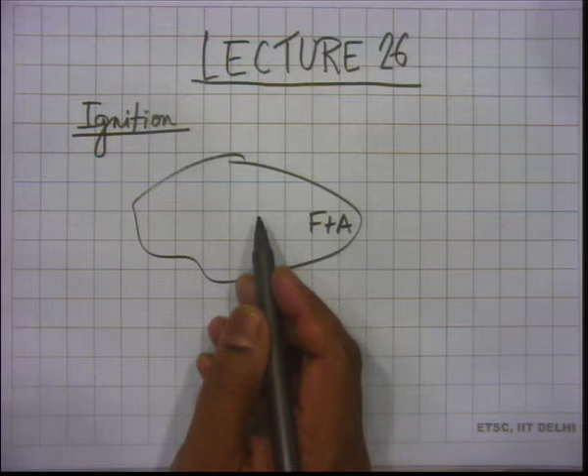So if you have a zone with a fuel air mixture, and you want to ignite it, you probably know from internal combustion engines or general knowledge that if you give a spark here, it might get ignited. A spark plug can be something like this: it has one electrode here, another electrode here, and when you give a spark, you are placing a very high voltage between these two electrodes, which breaks the dielectric between them, and then there is a spark kernel.

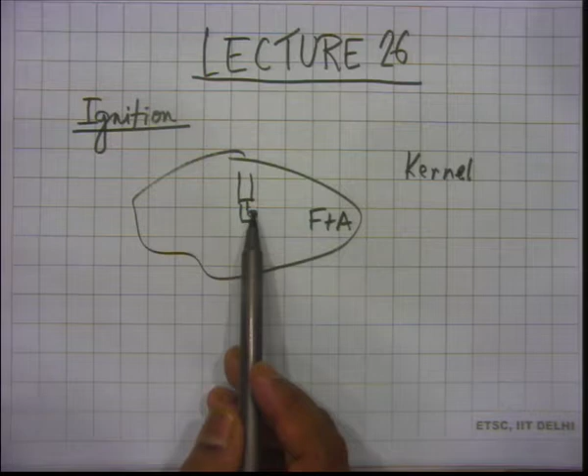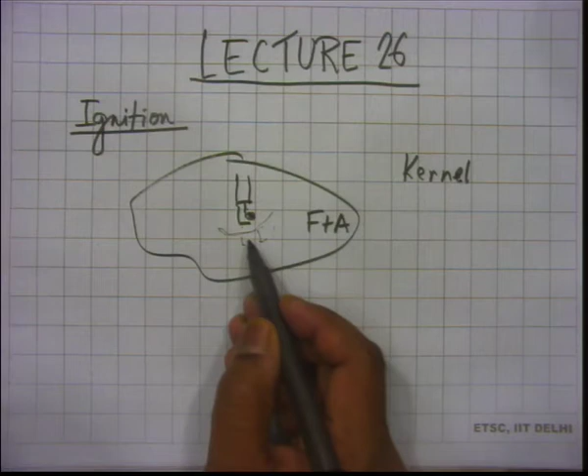Kernel is spelled K-E-R-N-E-L, spark kernel, which gets produced. That is a small zone at very high temperature, with active chemical species and ions. That high temperature and active species will help generate a flame which later becomes bigger. Then if it is an engine, for example, that flame will propagate like this. It doesn't have to be an engine, but as an example, in a spark ignition engine, that is what we do.

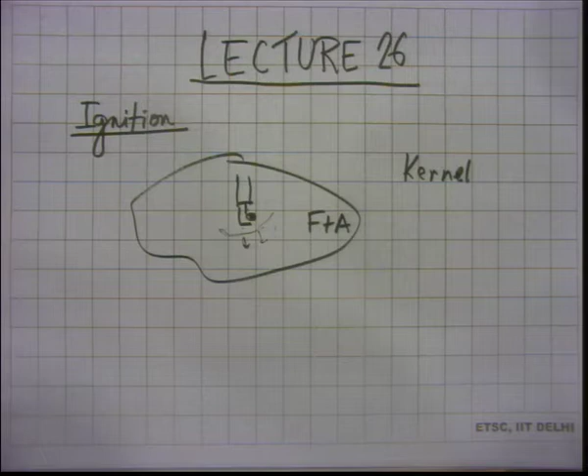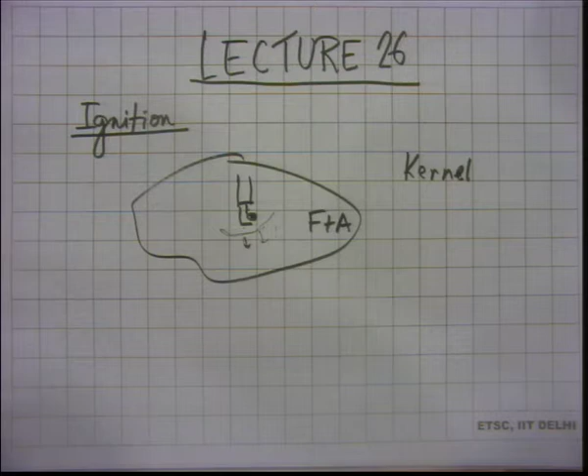So this is one mode of ignition. There can be another mode: you can bring a small flame, like a pilot flame, into the fuel air mixture, and that creates ignition. There are other modes of ignition which we are not discussing today, but we are primarily focusing on this spark ignition method. So you are creating a zone at high temperature where some active chemical species are produced. Let's say this is the kernel and this is the fuel air mixture.

Then what is actually successful ignition? Successful ignition is when this kernel is able to ignite and give a proper flame, when it is able to sustain itself. Imagine a situation where you have given a spark, created this kernel, but it is not strong enough, and after a small length of time, it gets extinguished. Then that is not successful ignition.

In fact, in engines you can have misfiring. Just because you are giving a spark does not mean it will be successful. If it is successful, then it is ignition. Some of you have done combustion experiments in the lab, and you know we have spark igniters there—if you press them, depending on the igniter, you can get one spark or multiple sparks, but they do not necessarily always ignite the mixture.

So what is successful ignition? Successful ignition is when that spark kernel you have produced sustains, becomes bigger, and then gives you a flame. Now in the process, we have to remember that we will try to model this situation and find out something about this zone we are creating with the help of a spark—the spark kernel.

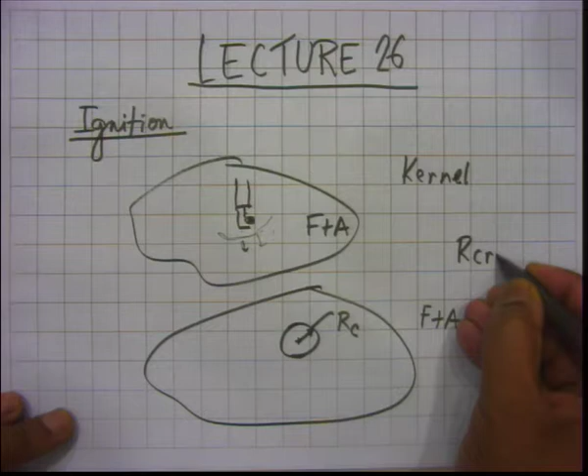Now, in Turns's book, he writes it as R critical, but we will just write RC, C for critical. And if I write a radius RC, that means I am assuming that this kernel is actually spherical. But that of course will not happen.

You can very well imagine that that is not going to happen, but again it is an approximation. So we can think of a situation when we have this zone of fuel air mixture, sufficiently large, in which we have created a spherical kernel, and we want to see when it will be successful, when it will propagate. We understand that smaller radius is probably not going to work, though actually we do not understand, we just think probably it might happen that way. So think about it, if it is too small, then what will happen?

We feel that if it is too small, it will likely be unsuccessful. The ignition event is likely to be unsuccessful. But is that a correct thinking? And how do you think about these issues? If it is small, then what happens?

It might not come in contact with a sufficient amount of fuel, so as to release the quantum of heat necessary to sustain it. So, area of contact, right? But we again have the same argument as before. Yes, you are absolutely right, the same sort of argument that we had yesterday.

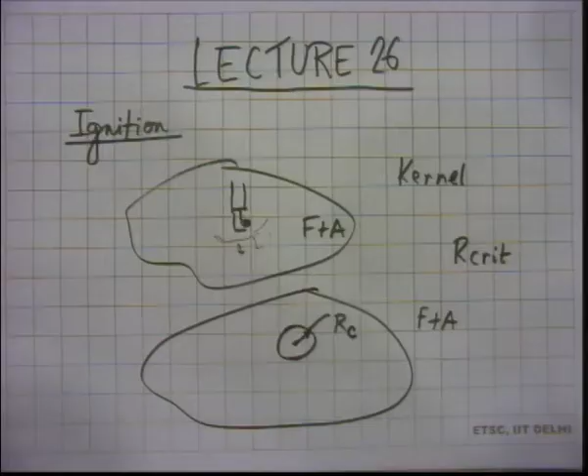So you expect that for small kernels, the heat loss is likely to be stronger than the thermal energy released in the flame. We will keep that argument in mind. So it looks like we will have a critical size, below which the kernel will not be successful in producing sustained ignition. More than this critical size, it will likely be successful, because the area by volume ratio has decreased, so heat loss has decreased compared to heat generation. This is what we suspect. So again, we will use that limiting argument of heat loss equal to heat generation.

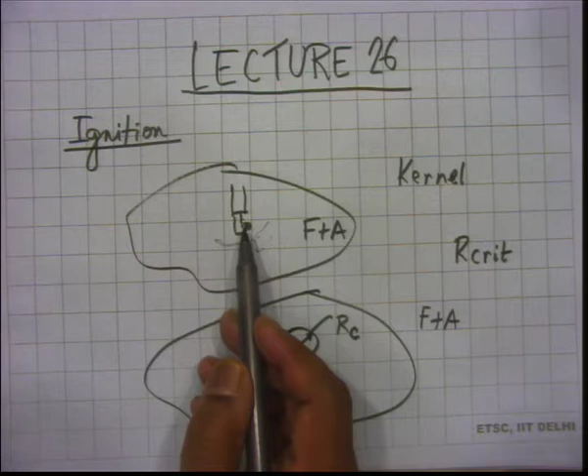Now, before we proceed, just one more factor. We will analyze this sort of situation, a large volume of fuel air mixture in which we have a spark kernel, and do the analysis based on that. But of course, in reality, if you have a spark plug giving a spark in an engine situation, the kernel loses heat not just to the surrounding gas, but probably also to the solid of the electrode, to the body of the spark plug.

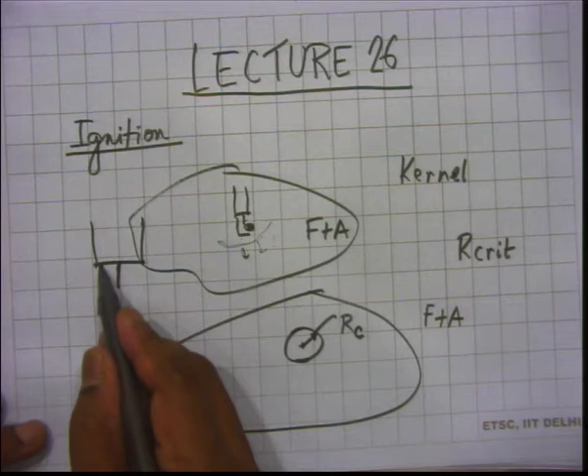So it will lose some heat out there. The gap between the two electrodes, if I draw the spark plug again here, this is one electrode, this is another electrode, the distance between them is also going to matter. If the distance is small, you are likely to have a small kernel with large heat loss, things like that.

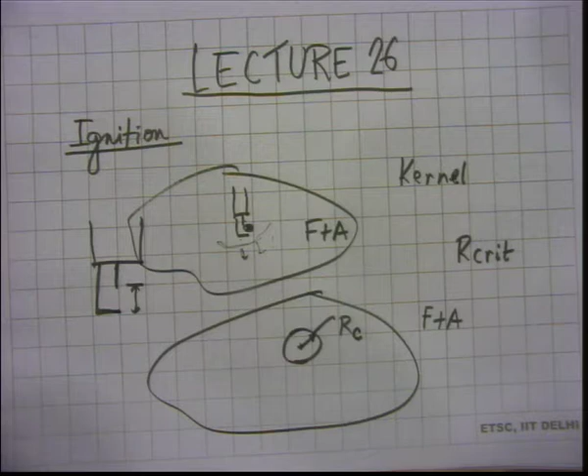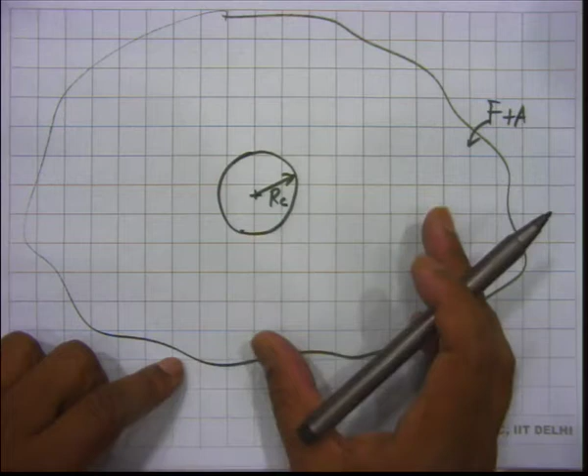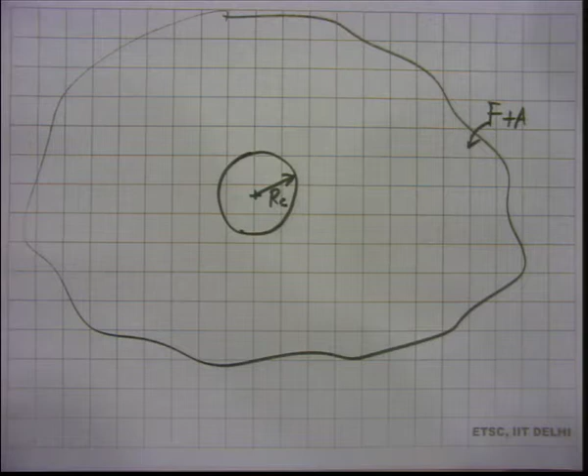So in the spark plug design, these issues are actually taken care of. But in our analysis, there are no electrodes, our analysis is just like this. Keeping this in mind, we talk about that kernel zone, and we call this radius RC, in this larger fuel air mixture. In fact, in the drawing, the kernel appears exaggerated, big enough and comparable to the fuel air volume, but it's actually very small compared to that. This fuel air mixture extends to large distances, and here we are considering a quiescent mixture, with no flow in the system.

In an engine, if you have the spark plug giving a spark and creating the kernel, there is flow. Because there is fuel air mixture in the engine, there is piston movement, there is turbulence, there is a lot of flow happening out there.

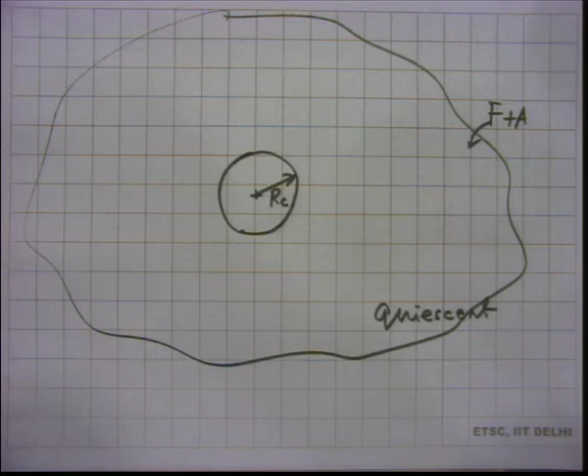In a flow situation, things will change. This kernel which we produce here will tend to get elongated in some direction depending on the flow, and the flow will contribute to heat loss in some ways. We are not in a position to describe all these things in detail.

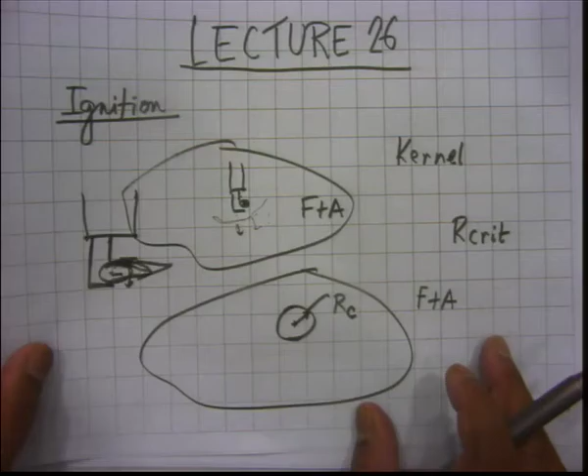So we are taking, as usual, a simpler situation where it is just the quiescent fuel air mixture. You are giving a spark, electrodes are nowhere to be seen, and you have generated this volume which is at a temperature of, let us say, Tb, the burnt gas temperature. So it is at Tb, and it is also reacting and releasing heat.

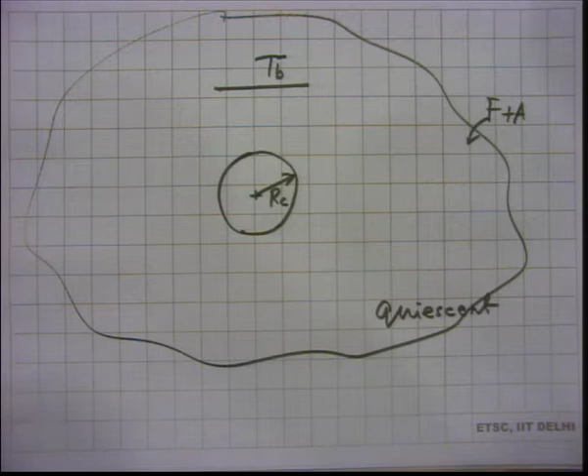That's within the sphere volume. Beyond the sphere volume, what do you expect? You expect the temperature to go down. It will go all the way down, and at sufficiently large distance from the spherical volume, the temperature should drop to Tu, the unburnt temperature.

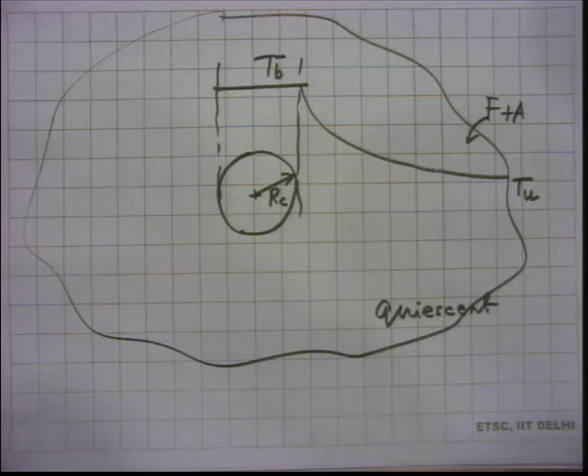So what is the sort of balance that we do? There is some fuel burning here that is generating heat.

So it is minus m dot f triple prime bar into delta Hc. This is per unit volume. This is the heat which is getting released, the thermal energy released because of chemical reaction. The spark has helped it, reaction has taken place, and this is releasing this much amount of heat.

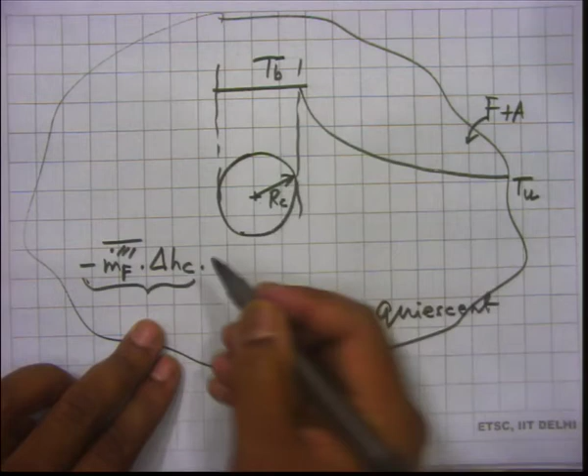And that multiplied by 4 pi by 3 r c cube. Why are we taking RC, R critical? Because we are looking at the limiting situation when heat generation is equal to heat loss. So that happens, and that will be equal to the heat loss.

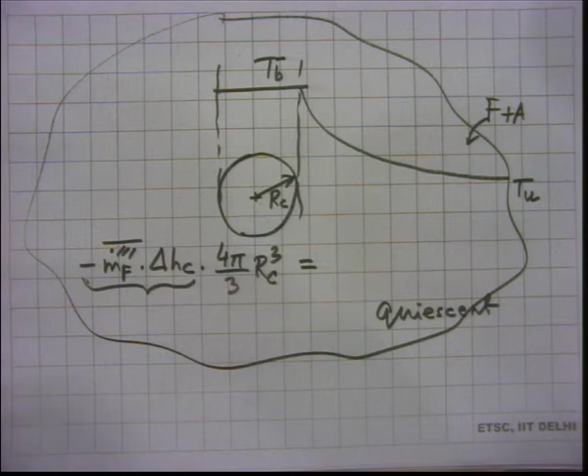So the heat loss will be minus K, then area is 4 pi R C squared, and then there will be dT/dr at r equal to RC. So this is minus Ka dT/dr at r equal to RC. So these two things should actually be equal.

So here comes the next question: how do you get dT/dr at r equal to RC? This is heat loss from that spherical volume to the surrounding gas, to the surrounding fuel air mixture, which is at a temperature lower than Tb, and which has a temperature variation in it.

So it is Tb at the boundary between the spherical volume and the unburnt gas, but as you move away from the spherical volume, temperature keeps decreasing, and sufficiently far away it becomes Tu. So the question is, how do you get dT/dr at r equal to RC, at the boundary of the spherical volume? That is the question.

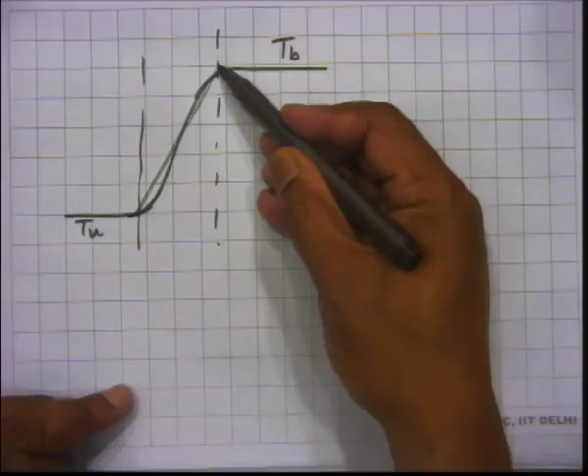So in the flame zone, the temperature variation is not linear, but we expect some rounding off here and there. We didn't know how to determine this exactly—if you want to, you have to solve a more complicated set of equations. We didn't want to do that, so we took this to be some linear temperature profile. But that was in the flame zone, a combustion problem we were trying to simplify, part of the derivation for laminar burning velocity SL.

Now, coming back to what we are doing today, we are trying to get dT/dr at r equal to RC. That can be obtained if you get this temperature profile.

Okay, now where is the r? R is the radial coordinate, so r goes like this.

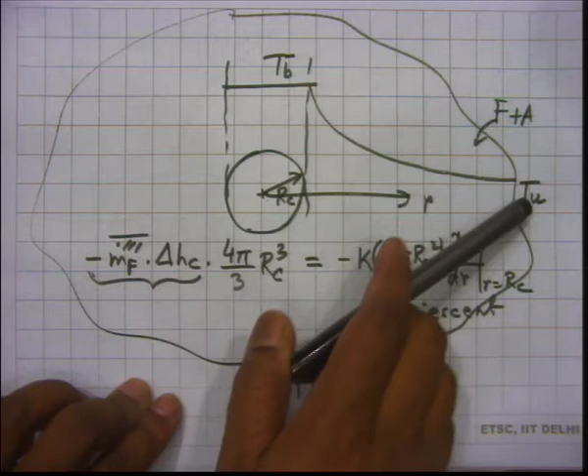Fine, so if you get t as a function of r, then you can get dt dr at r equal to RC, and that dt dr has to be looked at from r equal to RC and beyond. There is no point you can't get dt dr by looking inside the spherical volume, because in the spherical volume we have assumed it to be all Tb, uniformly Tb.

Not exactly a perfect assumption, but that is what we have assumed. We have assumed that with the help of the spark, somehow temperature has been raised, and the spark has helped by releasing that much amount of energy, and then there is reaction taking place, and it is all giving you burnt gas temperature. That is the assumption. So we have to solve for this, which we call T as a function of R.

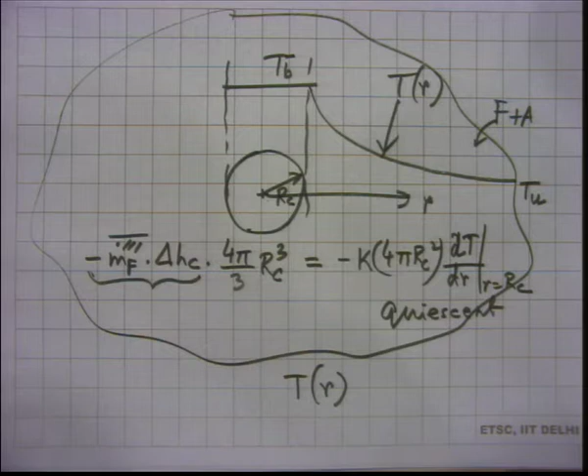Now, this is not combustion, correct? Because there is no combustion happening in this zone. So what do you have here? You have this part, right? That is everything except the spherical volume.

In that you have to find temperature. No chemical reaction is happening there. We are assuming there is no chemical reaction happening there, because the chemical reaction has been restricted to the spherical volume where you have used the help of a spark.

Right, so how do you get T as a function of R? It's not a combustion problem. That's why I'm asking you, because you must have done some other courses which will help you get this. Conduction is there, radiation is there. Yeah, so there is conduction, there is radiation. The radiation part we will neglect.

Okay, so if we solve the conduction equation in this part which I have shaded with blue, then you will be able to get T as a function of R. Correct? And it will require some differential equation and some boundary conditions.

Where will the differential equation come from? Heat equation, right? Heat equation. So you have energy equation for pure conduction, which is heat equation, written for this blue zone. And it has to be written in which coordinate system? No, not cylindrical, spherical. There is no cylinder here because we have the volume is spherical, so it's all spherical, right? So we can write the heat equation in spherical coordinate.

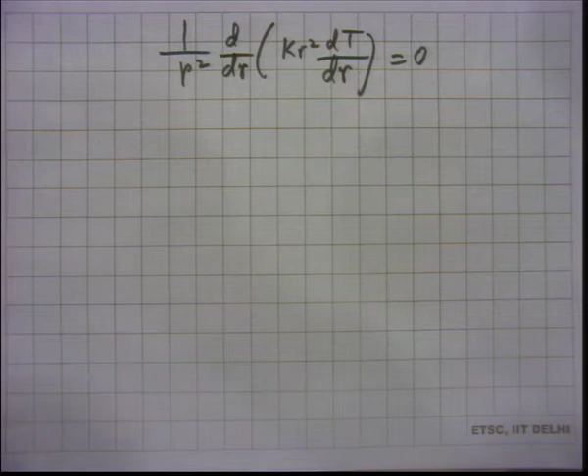So if you remember your conduction, then we should be able to write this. There is no heat generation term, heat equation in spherical coordinate, steady state, not transient. And this one, with a little bit of effort, this, okay, let me write the boundary conditions also. R equal to RC, T equal to TB, R tends to infinity, T equal to TU.

We can get T as a function of radius, something like this.

So I am now actually not doing this part, not doing the derivation, it is very simple integration. So when you integrate, you will get C1 and C2, and you evaluate those C1 and C2, the constants which come because of the integration using these two conditions, and then you should be able to get this.

And dT dr at R critical is this. This is dT dr.

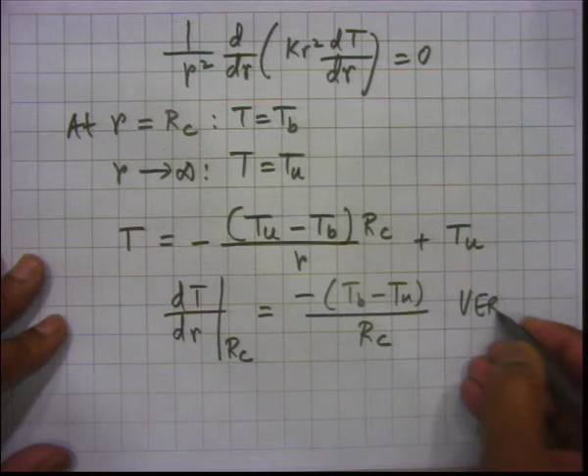So, we now know what to do. This you have to verify, of course. I have verified myself, but you need to do this yourself. So, leave some space in your copy and do this.

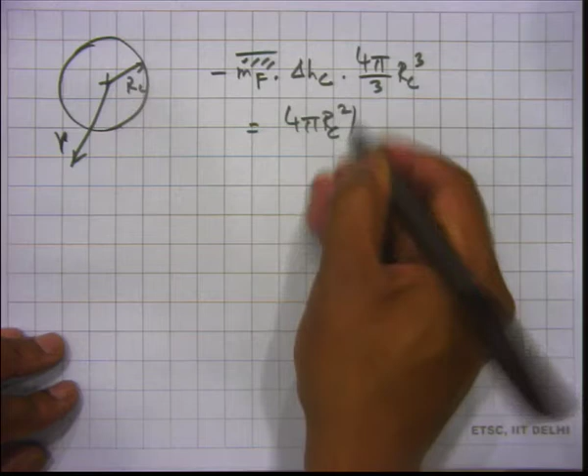So, this we want to use, and let us go back to the limiting condition that we had for this spherical volume. We wrote, so this is radius R C, this is some general R, and we wrote minus m dot f triple prime bar delta Hc 4 pi by 3 R C cubed is 4 pi R C squared K dt dr at R C, correct. This was the balance few minutes back, we wrote that few minutes back.

And now we have dt dr at R equal to R C. So, dt dr at R equal to R C is minus Tb minus Tu divided by R critical, right. So, this two minuses will make this plus, and this is Tb minus Tu by R C.

And just following up on what we did yesterday for quenching, you know now next what steps to take, right. So, minus m dot f triple prime bar will come from that SL expression. SL, we know that we have an expression for SL which we derived some time back. So, we have SL like this,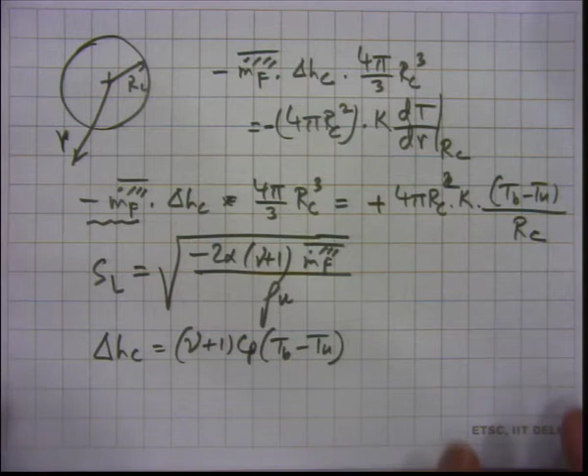and we will also write delta Hc as nu plus 1 Cp times Tb minus Tu, correct. So, we will utilize these here,

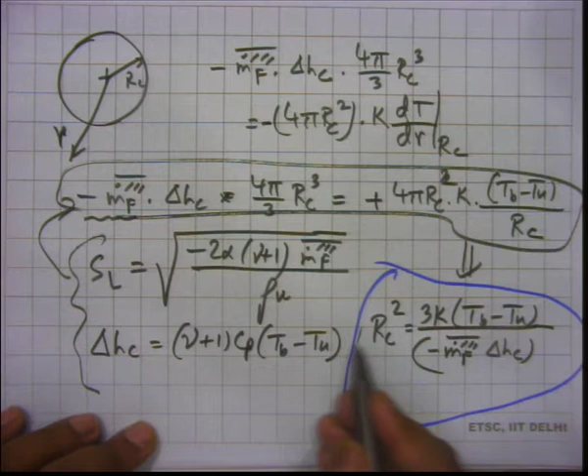okay, first from here we will be able to get, let us say, this box here, which tells you that R c squared is 3k times Tb minus Tu, this, and in this we can put those expressions.

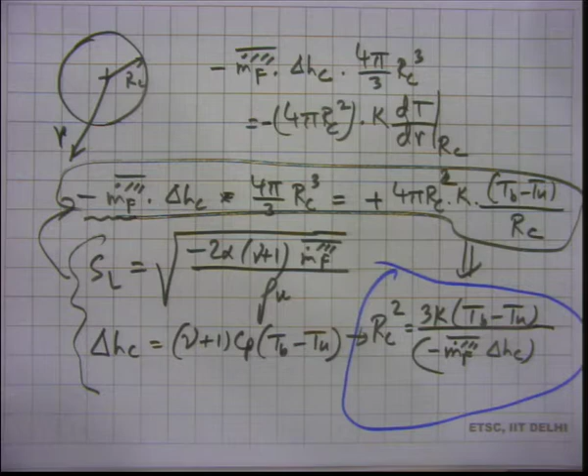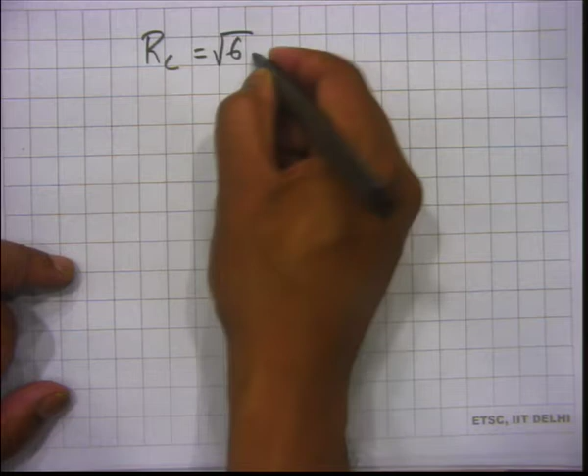So, again everything requires verification, you should be able to verify all this. And with a little bit of work after this, R critical comes out to be root 6 times alpha by SL. And that is of course root 6 divided by 2 into delta, correct.

So, the critical radius has to be more than the flame thickness. Like in the quenching analysis, where we got the quenching distance to be equal to square root of b into delta. So, here also we got the critical radius for successful ignition to be square root of 6 by 2 times delta. So, it has been obtained in terms of delta.

Now, delta can be calculated, because we have done this before. Delta is 2 alpha by SL, and SL we can get for various kinds of mixtures. Actually, we have the simple theory which will give us delta, or even otherwise you can also get SL values from correlations, let us say. I just mentioned a couple of classes back that there are burning velocity correlations in the book. So, using those also for various conditions you can get burning velocity, and once you get burning velocity you can calculate the flame thickness as 2 alpha by SL and then multiply it by root over 6 by 2 to get the critical radius for ignition.

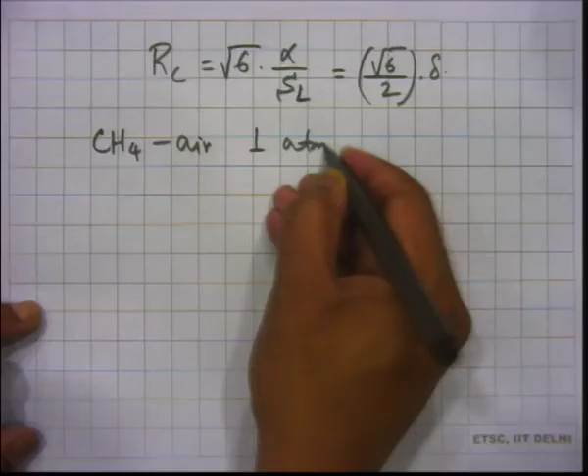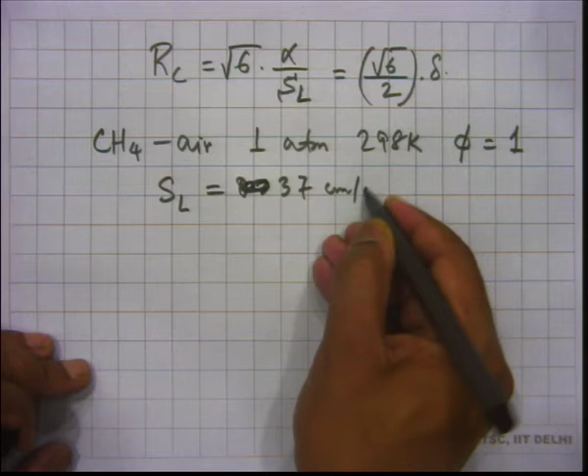No. SL is the fundamental property of the fuel air mixture. So, again, just to give a concrete example, if you have, let us say, methane air mixture, 1 atmosphere, 298 Kelvin, equivalence ratio of 1, then regardless of the situation we know that there is a property called SL, which is laminar burning velocity, which is 37 centimeters per second, okay, 0.37 meters per second.

So, we will use that value here. So, the question was, is SL equal to drdt? No, drdt in any case is kind of like a spatial speed, and we know that spatial speed and burning velocity are not the same. Burning velocity is transformation velocity, which is not necessarily equal to the spatial speed.

Okay, so we will just treat SL as a property. Remember that for a fuel air mixture, its laminar burning velocity for a given set of conditions is actually just one number. So, whether it is a planar flame propagating in a channel like what we were seeing yesterday in our quenching analysis, there is a slab, a sheet of flame propagating between two plates. Now, today we have a spherical flame which is trying to get bigger, right.

These are different configurations, but in all configurations we can use SL because SL is a fundamental property of the mixture. We say this because it's not configuration dependent, and it's not dependent on the fluid mechanics either, as long as the flow is laminar. So SL, laminar burning velocity, is a property.

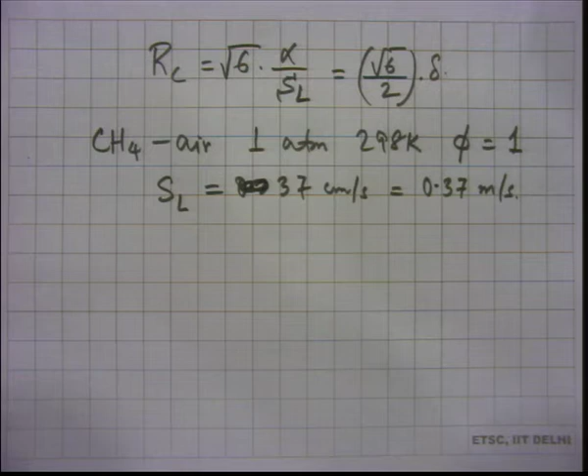There is also turbulent burning velocity, but it's not a property of the mixture - it depends on the flow situation and configuration. We haven't discussed turbulent burning velocity yet, though if time permits we will to some extent. So we are using SL as a property, and this allows us to calculate the critical radius RC for this ignition process.

Another interesting thing we can do is calculate minimum ignition energy. If you've done a course on engines, you may have heard of this. The minimum ignition energy is the energy given to raise the temperature of a fuel air mixture from TU to TB - this spark kernel, the spherical volume we've been looking at, was initially at temperature TU, and has been raised to TB, and now it's burning and releasing heat. It requires a certain amount of energy to raise a volume of radius RC to temperature TB - that energy is the minimum ignition energy.

Why do we call it minimum ignition energy? Because it corresponds to the critical radius. We could have given more than the minimum amount of ignition energy, and in that case we could have gotten a larger volume inflamed - a radius larger than RC if we wanted. That is also ignition energy, but not the minimum ignition energy. So the minimum ignition energy corresponds to the critical radius of ignition.

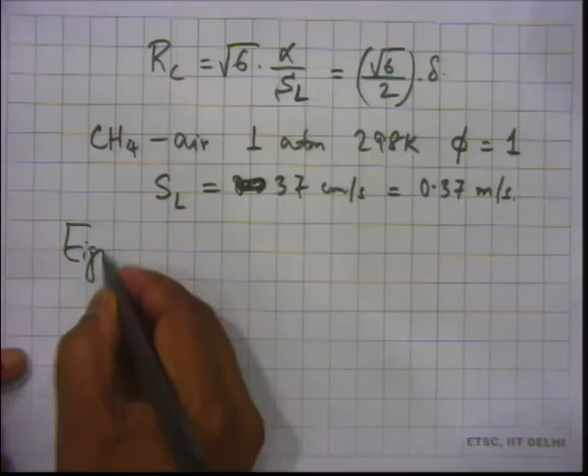So how do we calculate that? The ignition energy will be m, corresponding to that critical volume - mass corresponding to the critical volume - multiplied by a Cp which corresponds to burnt gases, multiplied by Tb minus Tu.

What we are saying is this spherical volume was initially at temperature Tu, and now it has been raised to temperature Tb. Who has done that? The spark has done that - some ignition agent has done that, and it has been able to do that by using some energy, and that energy is this much.

We can now calculate this, because m critical must be 4 pi by 3 times RC cubed, into rho b, into Cp, into Tb minus Tu. M critical must be this. At temperature Tb, we are considering this gas to have a density which is rho b, the burnt gas density.

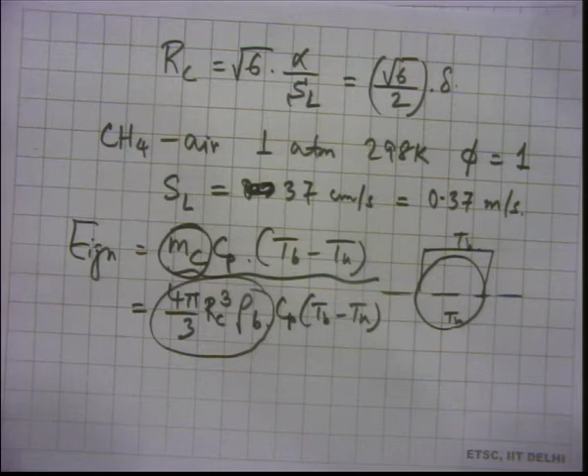We already have an expression for Rc in terms of delta, or in terms of alpha by SL. So if we place this Rc in the expression we just derived, we should be able to get ignition energy in terms of laminar burning velocity. That gives us this result.

Now, Rb is a burnt gas constant - 61.6 times pressure. You can ask: where does the pressure come from? From burnt gas density. Burnt gas density can be written in terms of pressure and the characteristic gas constant for the burnt gas - the universal gas constant divided by the molecular weight of the burnt gases, which we call Rb, and that Rb is showing up here.

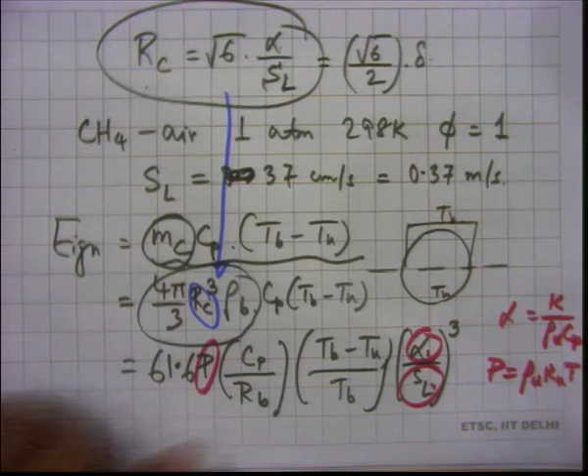If we neglect the pressure dependency of SL because it is weak, then it depends only on alpha. Alpha is K by rho u Cp, so rho u goes up, and it is rho u cubed. Rho u is proportional to pressure, so in total it will give you P to the power minus 2. Alpha is K by rho u Cp, and pressure equals rho u R u T. From that, you can see you get P to the power minus 3 coming from this, and then there is a pressure term, so it is P to the power minus 2. So E ignition is proportional to P to the power minus 2.

Actually, the good thing is people have done experiments and seen that this dependence is really very accurate, even though our analysis is simple. So ignition energy does depend on pressure in this fashion, inversely proportional to pressure squared. You increase the pressure, ignition energy in fact comes down.

What about temperature? If you increase TU, what will you expect? Lower ignition energy, because if you increase TU, reactions will become easier. So it's kind of clear that if you increase TU, it will be easier to ignite. Even without looking at the expression, I think we can posit that.

What about equivalence ratio? Ignition energy should be high on either side of stoichiometry. For example, if you have a lean mixture close to the flammability limit, you have to give more energy, and you can show that from here, because ignition energy is proportional to SL to the power minus 3. SL's value is smaller if you go to very lean mixtures or very rich mixtures, so there will be an issue there, especially lean mixtures will require more energy.

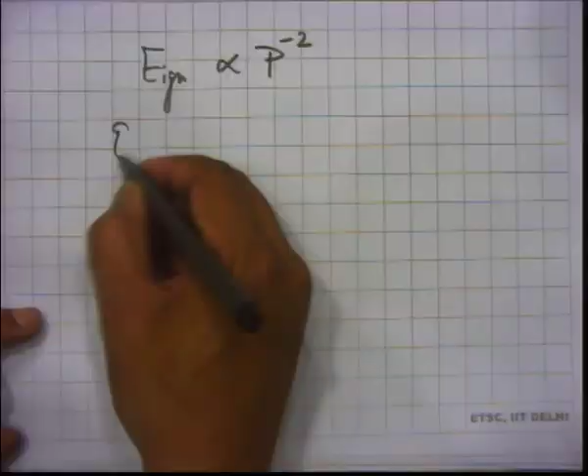Okay, so this is about ignition. We understand that we have considered quiescent mixture. In reality, there is flow, which we did not consider, and we did not consider electrodes. And as usual, we did not look at the transient nature of the process. A lot of things we did not do, but whatever we did gave us some physical idea of the situation.

So after laminar burning velocity, we are discussing premix combustion. After discussing laminar burning velocity, we talked about quenching yesterday, and we also talked about flammability limits, and today we have spoken about ignition, right.

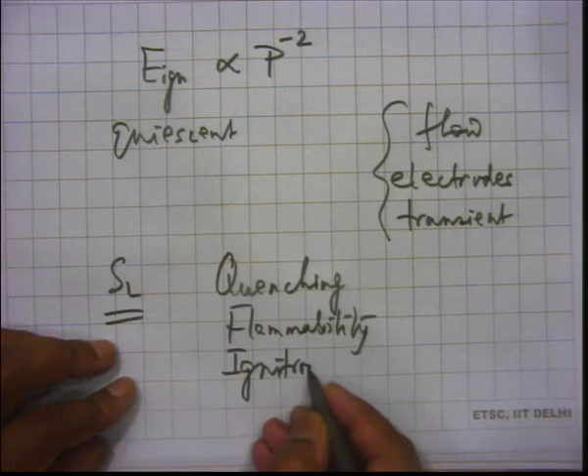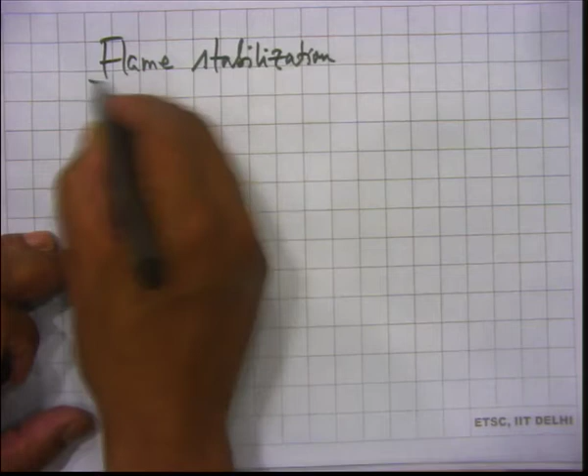But there are other phenomena which we want to cover, and we have just sufficient time to start that discussion today. So we will talk about flame stabilization. Flame stabilization is typically very interesting in the premix flame context. Even for non-premix flame context it is interesting, but in case of premix flames, I think it is more critical quite often.

Again, we will think about some of the videos that we have seen before, and we have seen the flames can flash back, and then flames can get lifted off the burner, and flames can get blown off, right. So when I talk about flame stabilization, we will try to understand when does the flame get lifted from the burner, when does the flame get blown off, and also when does the flame travel back inside the burner. Some of that understanding we have already developed because we are discussing quenching and things like that, but that discussion is not complete.

So we will take that discussion up, the entire flame stabilization discussion, from now onwards. Today, in the limited time that we have, we will talk about stabilized flame, and then slowly we will go towards situations where the flame does not remain stable, does not remain anchored on the burner.

So this is a tube burner. Again, in this course often I am drawing tube burners, but actual burners can be much more complicated than this. Of course, we cannot go to actual burners with more complications, let us say swirling flow in it, or different kinds of port arrangements, lots of other complications which people use. We cannot use that now.

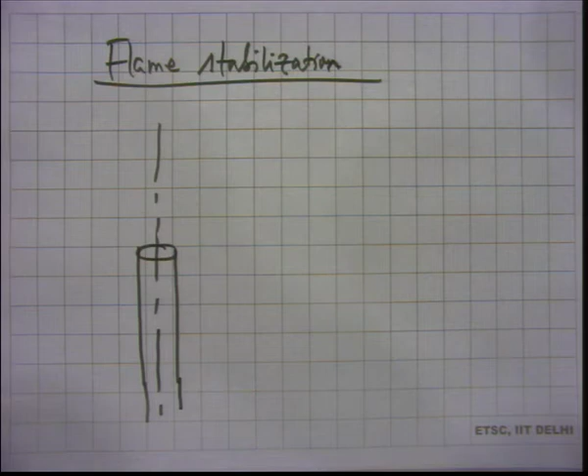So just looking at a very simple situation, it is like a Bunsen burner, and we have seen again some examples of Bunsen flames. So we know that we get flame like this, and the lower edge of the flame is very close to the top of the burner, that is the burner rim. So it is very close to that. If it is very close to that, then we call it a stabilized flame.

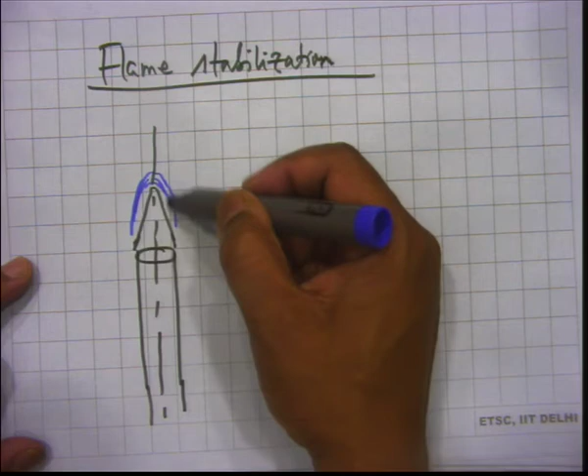And we also know that there can be a diffusion flame zone, a non-premixed flame zone, just outside it. If something is not burning in the premix flame, it can go above that and burn there. So we typically can see two flames, but we are primarily focusing on the premix flame now, and thinking about situations for laminar premix flames, because these are easier to understand. So once we finish this, we will try to go to turbulent premix combustion also, to a limited extent, because we may not be able to spend a lot of time on that.

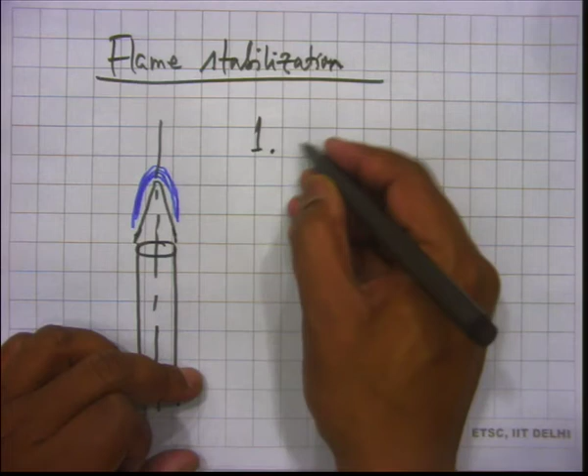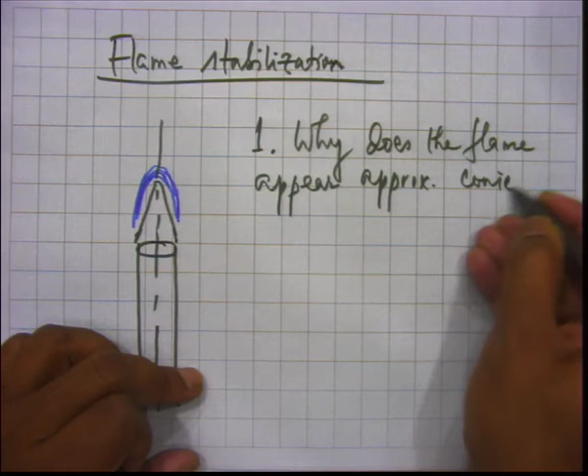So what are the questions that come to your mind if you look at a figure like this? One question probably, I am guessing, is why does the flame appear approximately conical? It is not exactly conical, but why does it appear approximately conical? How does it become like this?

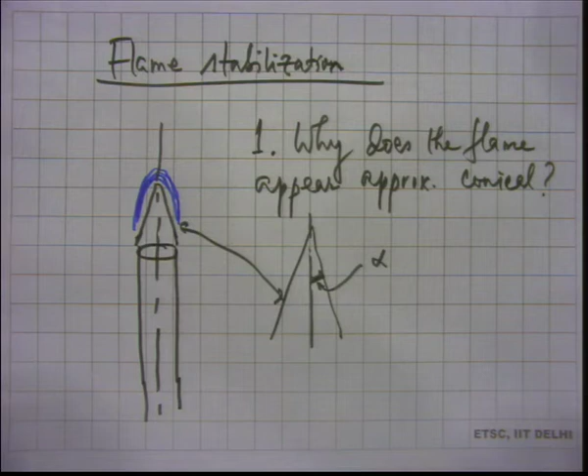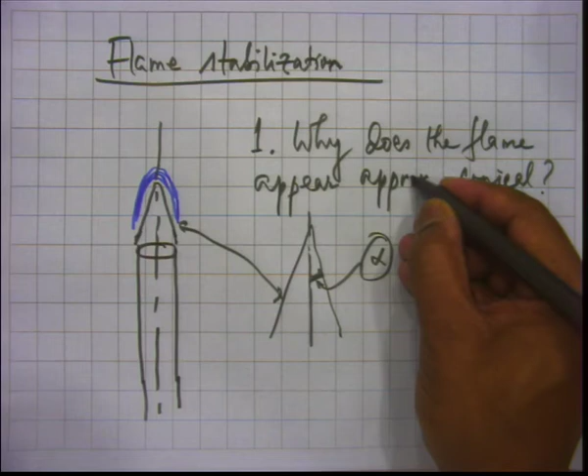Actually, some of you may have done experiments in the lab when we have taken photographs of this premix flame, and from that, treating this flame as an approximate cone, we have measured, maybe from a direct photograph image processing, or maybe through some optical methods like Schlieren method or shadowgraph method, this half cone angle which we call alpha. From that alpha, in those lab experiments, people have obtained an estimate of the laminar burning velocity. Some of you may be familiar with this, but that does not answer this question, why does the flame appear to be conical? It is definitely very close to being conical. So why is it conical? So that is one question.

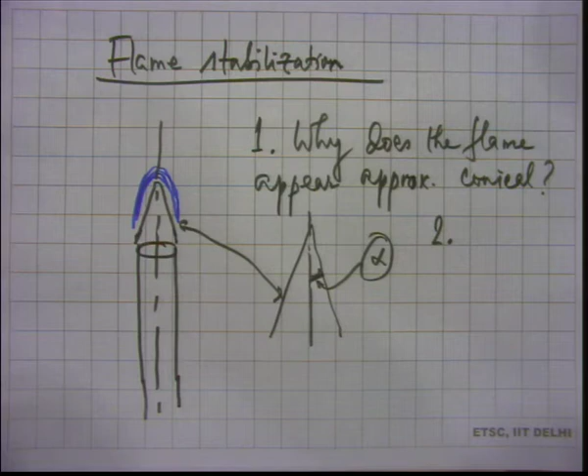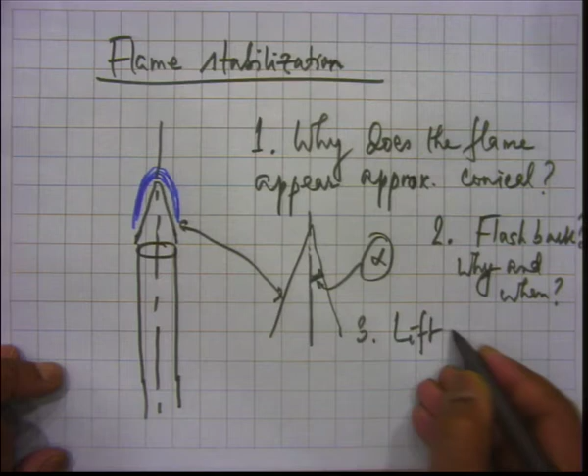So the next question is, I have already mentioned that in some situations the flame flashes back, so that it goes inside the burner. So why does it flash back, and when? And then lift off. Lift off means the flame is still there, but it is kind of lifted up, so this gap is significant now, easily observable.

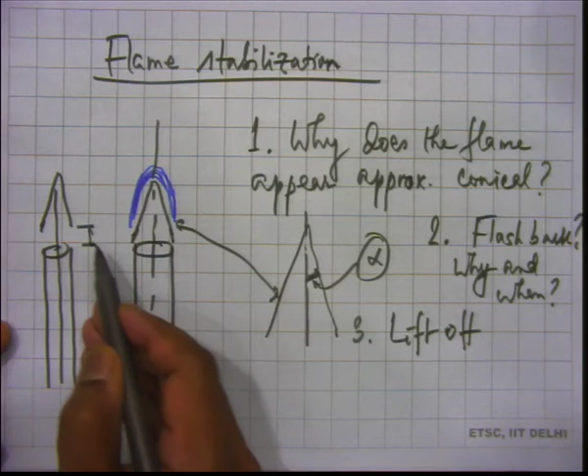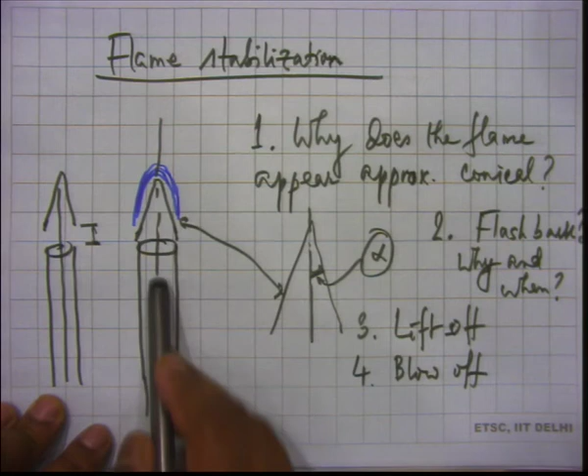So this is a lift off situation, and again the same why and when - why do you get this lift off, and also for blow off. Blow off means that the flame just extinguishes. Typically, if you have a stabilized flame and you increase the flow rate of the mixture, at some stage it gets lifted, and if you increase the flow rate even further, it will get extinguished. We kind of know all these things, but now we should be able to explain all this.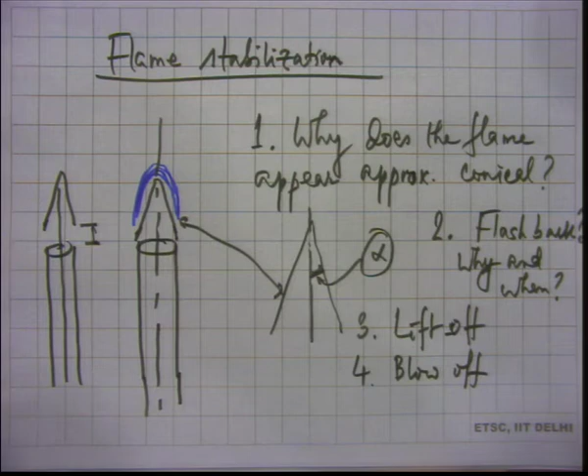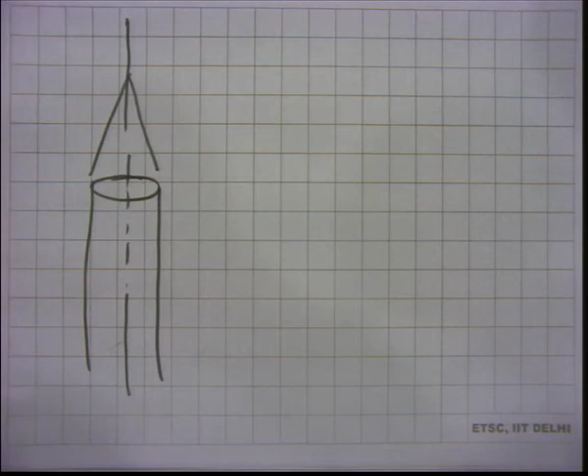So the first question is, why is it approximately conical? Drawing it as a conical flame. We have probably used this expression some time back, SL equal to VU sin alpha, where this is alpha. Did I write this before? Yeah.

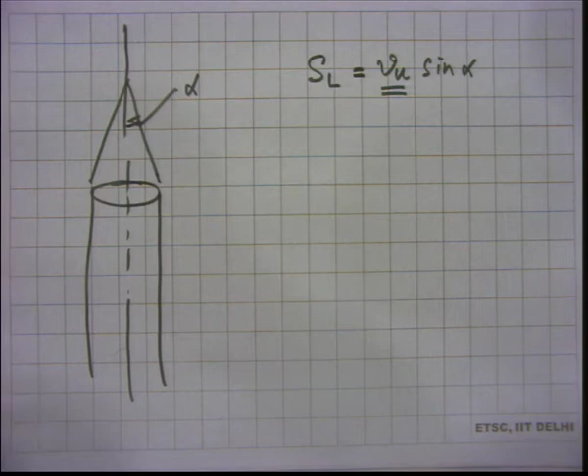So what is VU? VU is the unburnt gas velocity, typically at the exit of the burner. Now let us think about the unburnt gas velocity at the exit of the burner - is it one value VU, or does it have a distribution? Depends on the burner design actually. In a tube, typically there will be variation of velocity, and it may look like a parabolic velocity profile, but you can actually use a sharp edged orifice to get a more uniform velocity pattern.

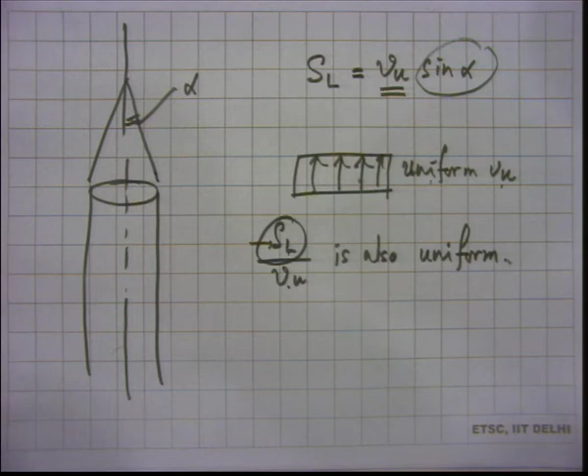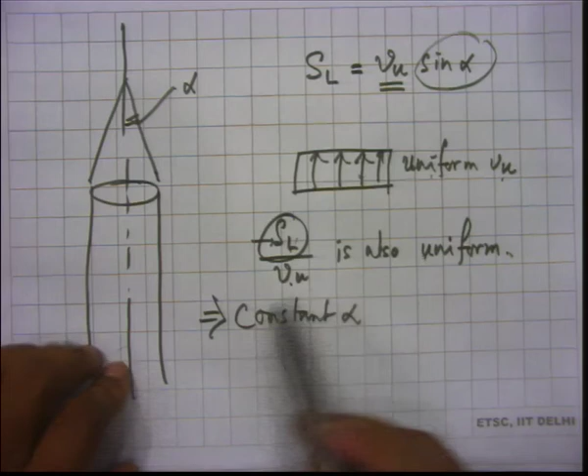So if VU is more like this, uniform VU, then SL by VU is also uniform, correct? So what do we mean by that? SL is, for a given fuel air mixture, one number - like a 1 atmosphere, 298 Kelvin methane air mixture at equivalence ratio 1, stoichiometric mixture, SL is 37 centimeters per second. So SL is just one number, and if VU is uniform, then SL by VU is also just one number. In that case, you get a constant value of sin alpha, and then you get a sharp cone, constant alpha. So SL by VU uniform means constant alpha, which means a sharp cone.

Okay, what do we mean by a sharp cone? In an actual geometrical cone, it looks like an actual geometrical cone. But if alpha varies on the surface of the cone, it is not really a sharp cone - if there is variation of VU, or variation of SL, and SL by VU is not uniformly the same value, then it is not really a sharp cone. So that is possible - in reality, flames are not actually sharp cones. So what we have just seen is that if VU is uniform, and SL is just one value, then the flame will give a sharp conical surface.

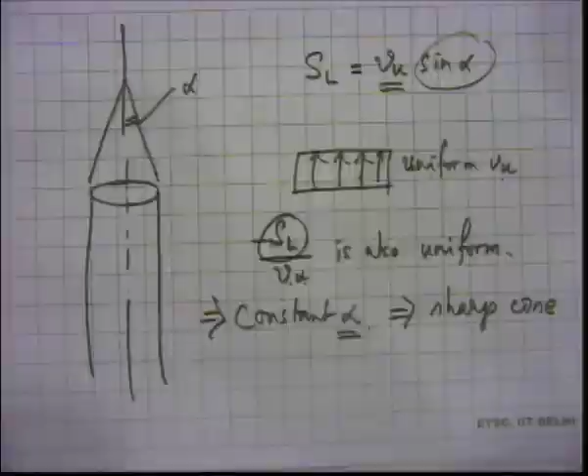But at the first place, why is it conical? We started from here because this is something I had already told you. But why is it conical in the first place - is it possible to get some other shape which is not conical? What the flame is trying to do is assume a shape which gives the unburned gas's normal component of velocity equal to its laminar burning velocity. That is what it is trying to do.

So what is burning velocity? Laminar burning velocity is the velocity with which the unburned gas moves into the flame, normal to the flame and relative to the flame. So as you change the velocity through the tube, the flame kind of adjusts and tries to always produce a surface where the unburned gas's normal component of velocity becomes equal to the laminar burning velocity. Now let us try to understand this a little better.

If you have a tube - and somehow in a tube it will not happen typically, but let us say - if you are able to make VU equal to, let us say, 37 centimeters per second, talking about that same methane air mixture, in that case what kind of flame might you get?

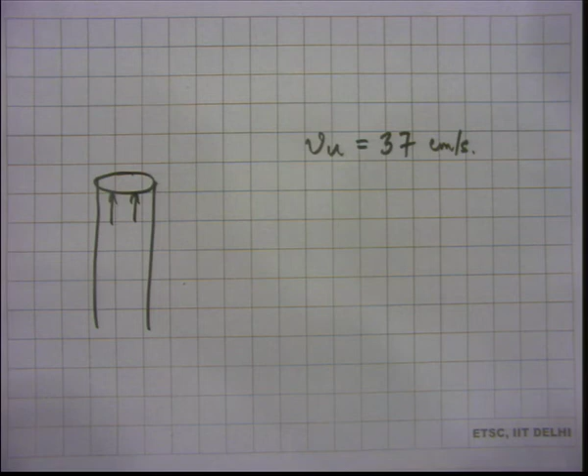Will it look conical? Actually, it did not look conical. What is the flame trying to do? SL equals the normal component of Vu, but Vu itself is 37 centimeters per second. So, can the flame be like this?

So, the unburned gas is moving into the flame at 37 centimeters per second. That is satisfying for the flame, because the flame has its inherent property, the laminar burning velocity, which has to match the normal component of the unburned gas velocity. So it can give you that, but the trick is that in real life it is very hard to get this uniform velocity at 37 centimeters per second produced on a burner, which will give you a flat flame like this. So it is hard, but it is actually possible.

Now, if you increase the velocity, if it is more than 37 centimeters per second, close to 37 but more than that, then you will slowly start seeing that the flame becomes like this, a small flame, with this large value of alpha.

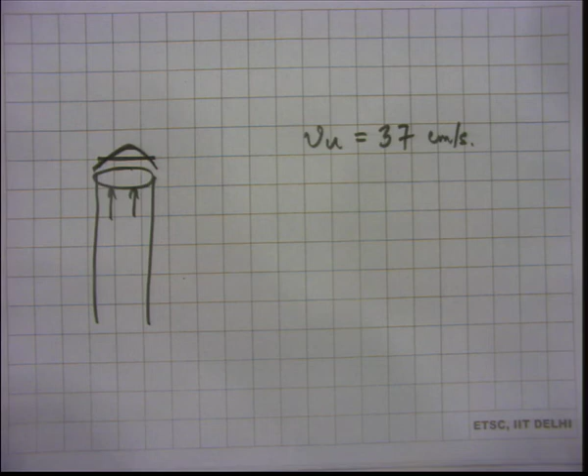If we increase the velocity further, what will happen? The flame height at the center line should increase, isn't it? From intuition, it's possible to say such things, but intuition itself may not always be enough. We have to see whether it's logical or not. So if you increase the velocity, you will get a flame like this.

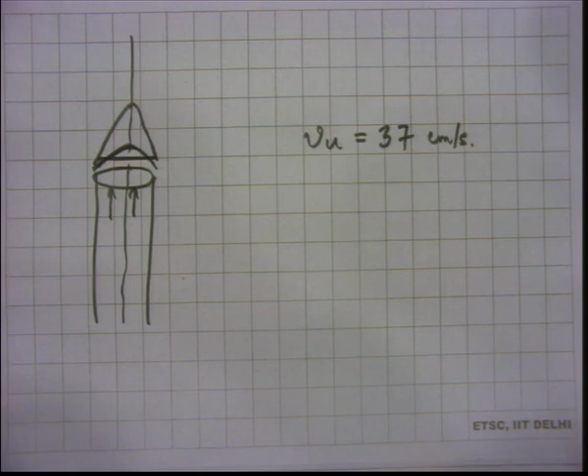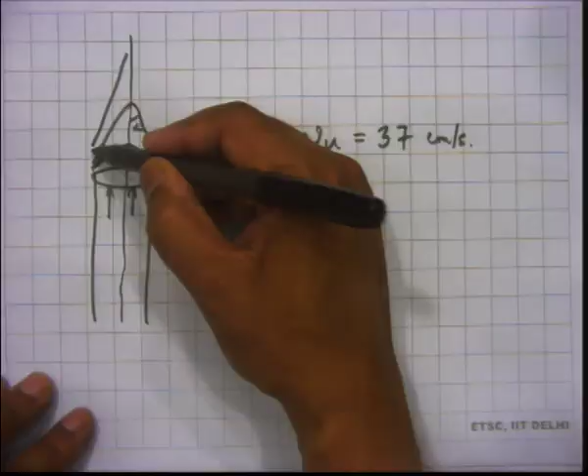So what has the flame done? Because now the flow velocity Vu is maybe 55 centimeters per second, sin alpha is SL by Vu, so it's 37 by 55, which is almost like 2 by 3. So sine inverse of that, whatever it comes out, that's the alpha it produces. And if you increase it further, it will still give you a sharper cone.

So it's always trying to adjust its shape so that the normal component of the velocity becomes equal to SL. Why is it trying to do that? Because that's the rate at which it can consume the fuel air mixture. It has this inherent limitation, it can do only 37 centimeters per second. That SL translates to some mass consumption rate, M dot double prime equals rho u into SL. So it can handle that mass consumption rate of rho u into 37 centimeters per second. So it's trying to get the flow equal to that, and it's adjusting its shape.

It's a nice thing that it is doing, it's doing it on its own, right? So can you relate this flow to the internal flow of fluid through pipes? Because due to boundary layers and such, it becomes parabolic in circular pipes. So in the center, the speed is always maximum. Accordingly, in the center part, since U is high, it goes to a longer distance, and the surface part is a shorter distance. That's why the profile is like that.

Okay, the question here is that for flow through this tube, there is a velocity variation, so the maximum velocity is expected at the center line. So the question is, what is causing the flame to be tallest at the center? Actually, the reason I was discussing a few minutes back, that if Vu is uniform, then we get a very sharp uniform cone, the reason I mentioned that is that the conical shape is actually not dependent on the parabolic velocity profile. Even if you get this parabolic velocity profile with a high velocity at the inlet, of course you can get a conical flame, we still haven't discussed that. I am saying that even if it is uniform flow, you still get a conical flame, because the flame is adjusting its shape so that it can consume the fuel air mixture properly.

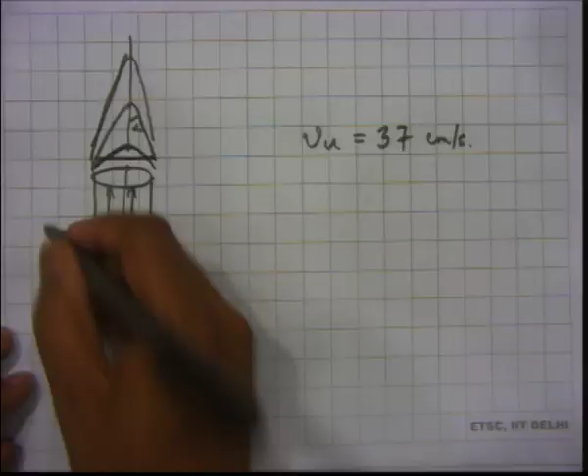So we will come to that velocity variation issue also, and we will just close in a minute. If we increase the velocity further, it will become a still sharper cone, but beyond a point the flame cannot adjust like that. The cone angle becomes too small, and after a while the flame just gets lifted off. It cannot continue becoming taller and taller with a smaller half cone angle, it cannot do that. Okay, so we are running out of time.

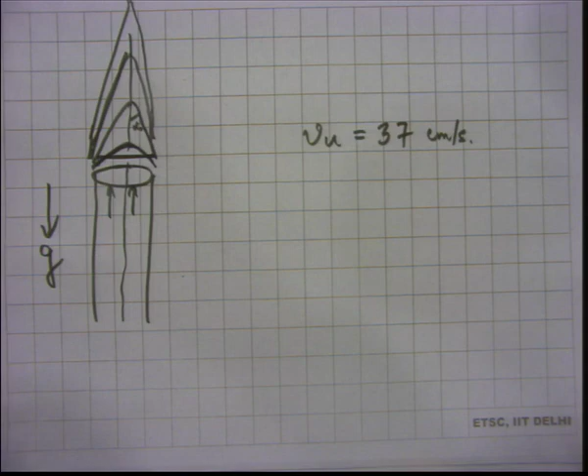Since we are running out of time, we will stop here. In the next class, we will start from this discussion, and then maybe understand lift off and blow off, and then go to flashback also. Thank you.